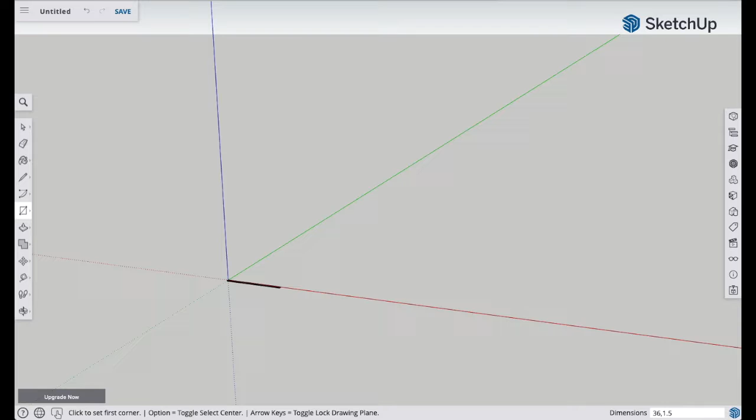And first I'm going to create the horizontals using the rectangle tool. And you can see here when I zoom in, I'm just typing in the actual length and thickness of the piece. And then once that's done, I'm just using the push-pull tool to again move up to 1.5 inches. So I'm going to use 2x2 cedar that I happen to have on hand, and then making it into components since I will be duplicating these.

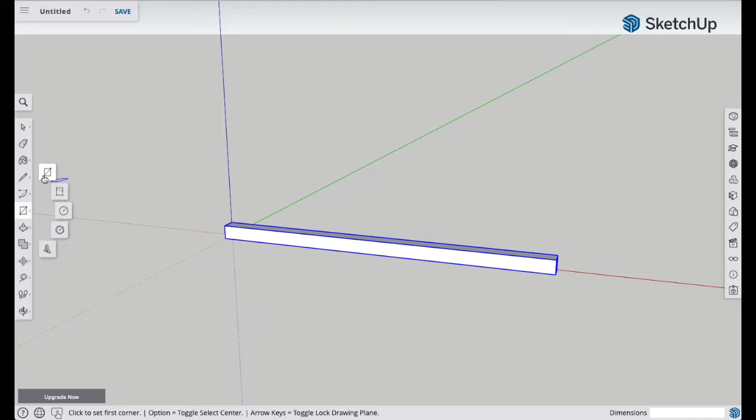So then I also need uprights to tie all the horizontals together. So again, I'm doing a 1.5 by 1.5 rectangle, or square in this case, to meet the dimensions of the cedar 2x2s. And then I'm going to pull it up with the push-pull tool again and make it 16 inches high. And then, like I said, we'll make another component.

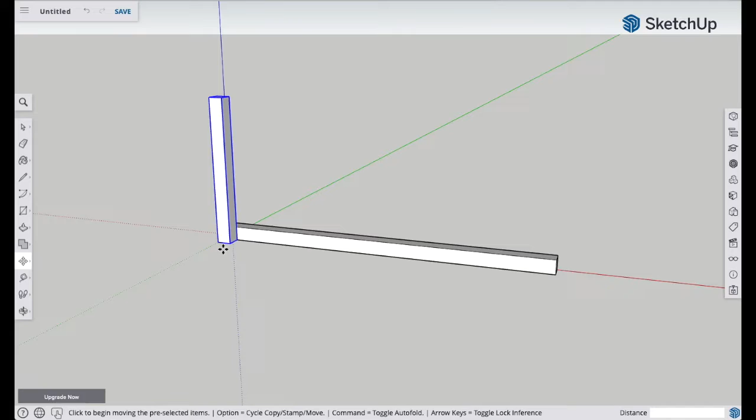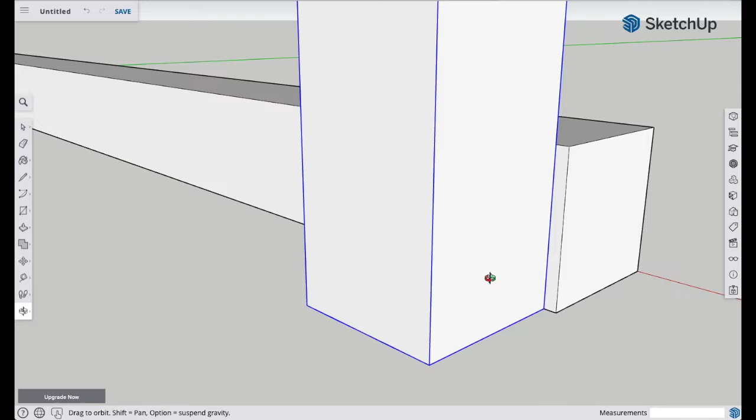And then we can duplicate this one as well, since we do need some uprights. So I'm going to use the move tool with the option key pressed and move it over to be able to align it hopefully with the end there. I'm going to have to actually orbit around a bit to, there we go, that's better. And then I'm going to just snap it to that end of the horizontal.

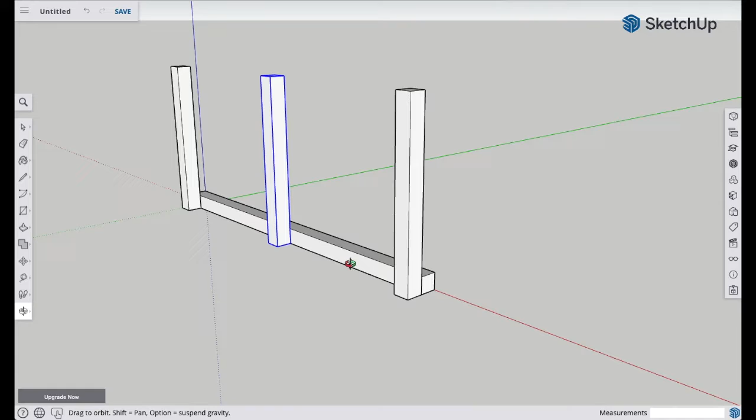I'm going to grab it by the midpoint and I'm going to move it over, and I'm going to actually just constrain it to the line using the arrow key, and then find that midpoint of that horizontal, and that way that piece is exactly in the middle. Then we're going to do the same with the horizontal. I need 2, and you'll see why at the end.

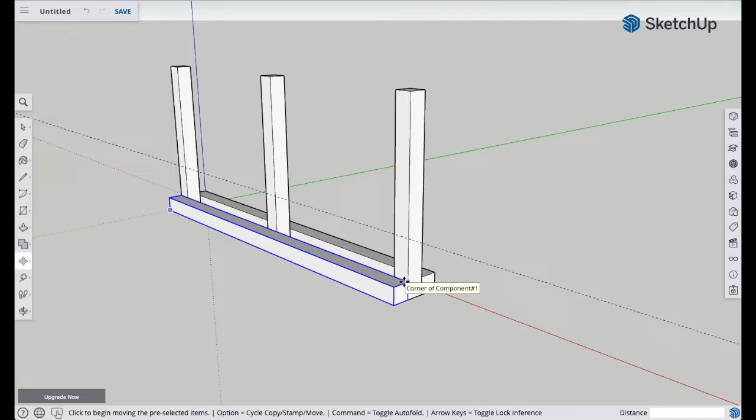And again with move tool with the option key pressed. And then I'm going to just make sure that I space out the horizontals enough, and I'm going to do 3.5, so I've created a guideline there. And again, option key held down, move tool, and that moves it into the right location. Repeat with, again, a 3.5 inch guideline, and again, another move.

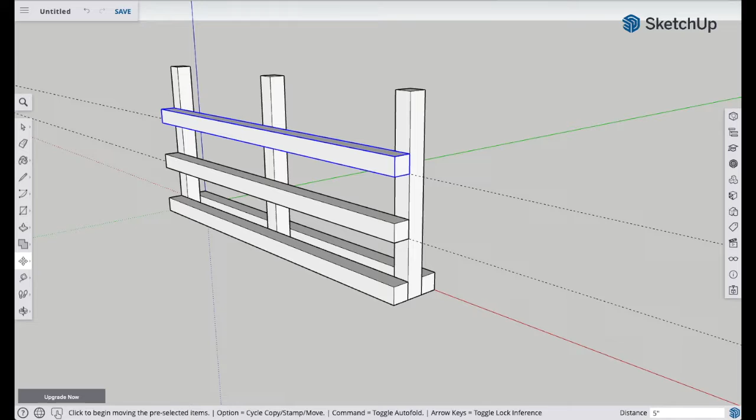And then to get the same horizontals on the back side, we'll just again use the move tool, option key held down, drag it over, and keep it just horizontally constrained, again with an arrow key. And so that's the basis of it. So the way that that'll work is the bins will sit on top of those horizontals on their side.

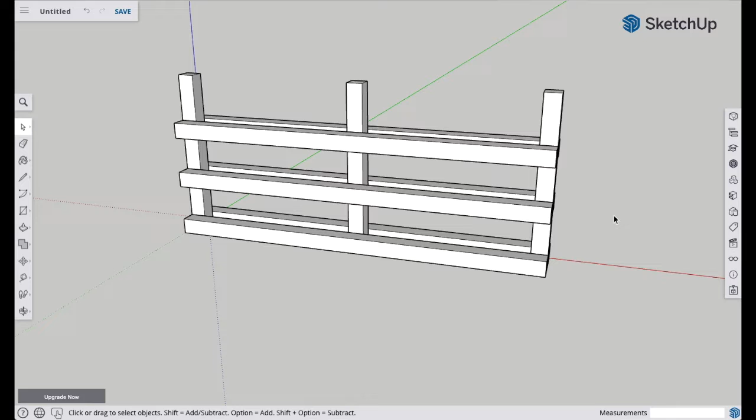And I'm just checking the width to make sure that in this case 3 will fit comfortably along that one section. So we'll have 6 on each tier. I delete the guidelines as well. Now the other thing I need to do is I need to make sure that this is tipped slightly backwards so that the bins don't fall out.

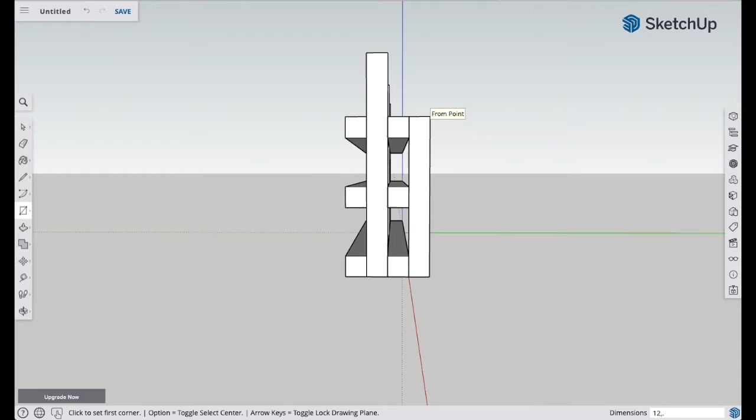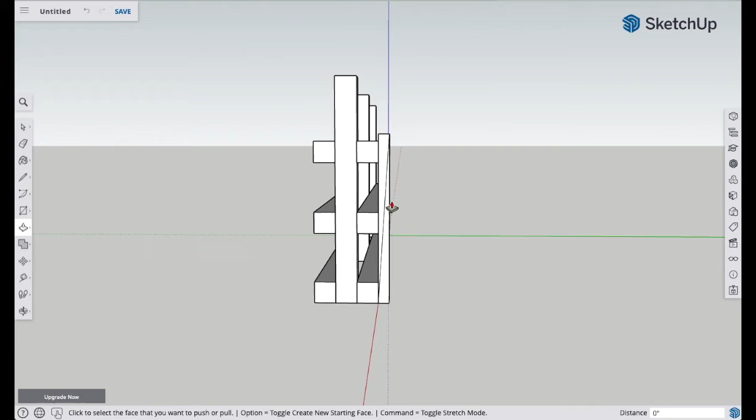And so I'm just going to be creating a thin wedge, and so I'm making the wedge 12 inches long but only 0.75 deep, but again 1.5 inches wide. Okay, so then what we'll do is actually make a wedge out of it. So I'll use the line tool, and then I'm going to use the push-pull tool to actually just get rid of that section. If you drag it all the way to the 1.5 mark, it then just disappears. So now we have a wedge.

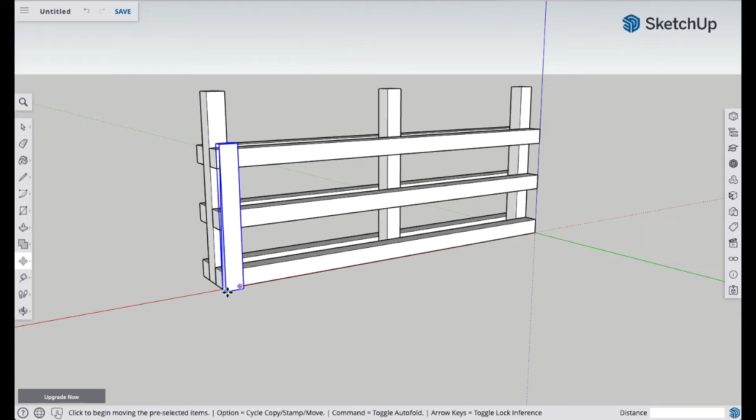So then the next step is to actually rotate. Well, we'll make a component first because I need a few of these wedges. Duplicate the wedge. Again, move tool, option key held down, and I'm just going to align it up with that other vertical upright, and then again here, constraining it.

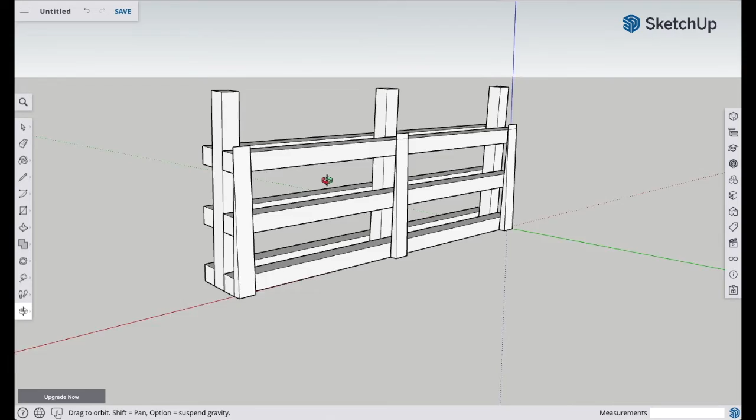And the wedges are done, but now the problem is I need to rotate this whole assembly, and I'm just selecting all of it. I could group it, but I'm not going to bother. I'm going to rotate it along that bottom edge there, or the bottom corner, and then just snap it to the wedge. Now you can see that when I mount it on the wall, it'll be slightly angled back so that the bins will stay in place.

And yeah, essentially this is done. Now it's just a matter of grabbing some wood and to start putting it together in the next video.